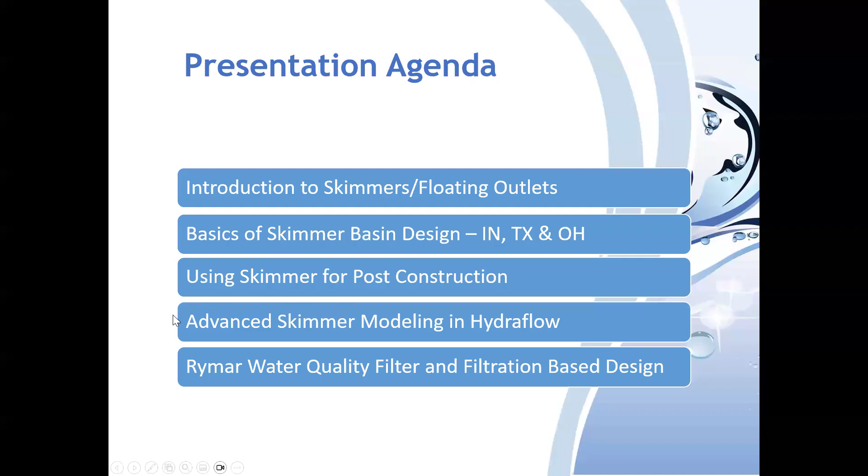So today's agenda: we're going to do an introduction to skimmers, or floating outlets as they're called in some places. We're going to go over the basics of skimmer basin design. We have a focus today on Indiana, Texas, and Ohio. Each month we do these and try to change up the states we focus on, so this month we're focusing on those three. Then we're going to pivot and talk about using skimmers for post-construction, why you would want to do that. We'll get into how you would model a skimmer in Hydraflow. And then we're going to wrap up with our water quality filter and a filtration-based design, which is a pretty new concept we just want to introduce to you.

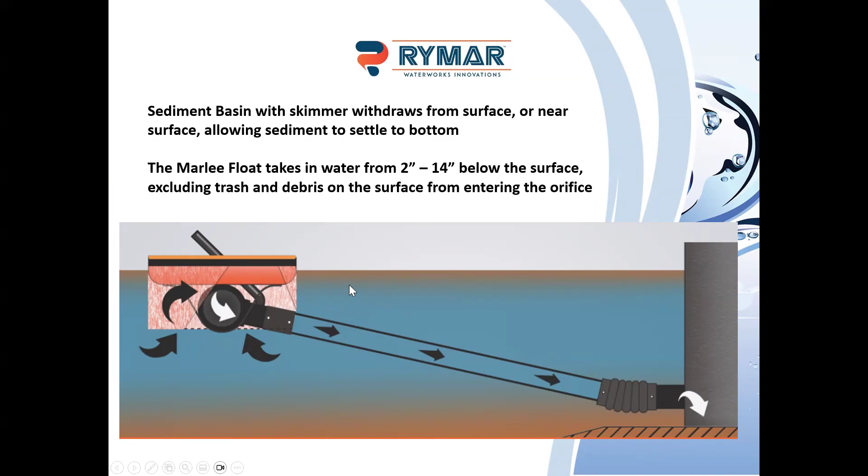Skimmers have been shown to be very effective. Typically it's fairly easy to achieve at least 80% trapping efficiency with a basin that's properly designed with a properly designed skimmer. So there are a number of skimmers on the market.

You've got the Faircloth skimmer - they were kind of the first to market about 25 years ago. The Erosion Supply Skimmer, or ESC, is kind of similar to the Faircloth. You have the IAS skimmer, which is kind of a T design, and then you have the Marlee float, which actually looks a little bit different than the others.

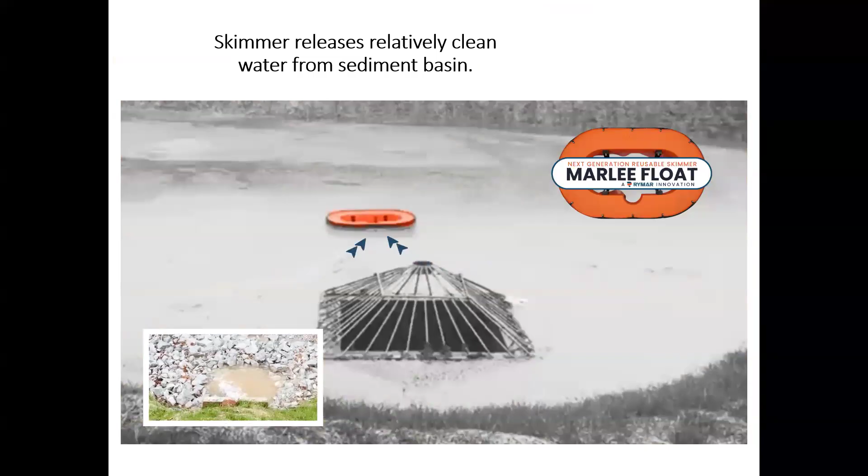So this is a little quick video. This is a sediment basin on a site that has about 8 acres disturbed draining to it. This is a major storm - it actually washed out part of the bank, but had really muddy water in the basin.

Here's the discharge. You can see there, it's really clear water, much clearer than you would probably think would be discharged from that basin. Really important here, this site was about 100 yards from a lake, and we really didn't want to get complaints from the neighbors about turning the lake brown. So anyway, the skimmer was working really well.

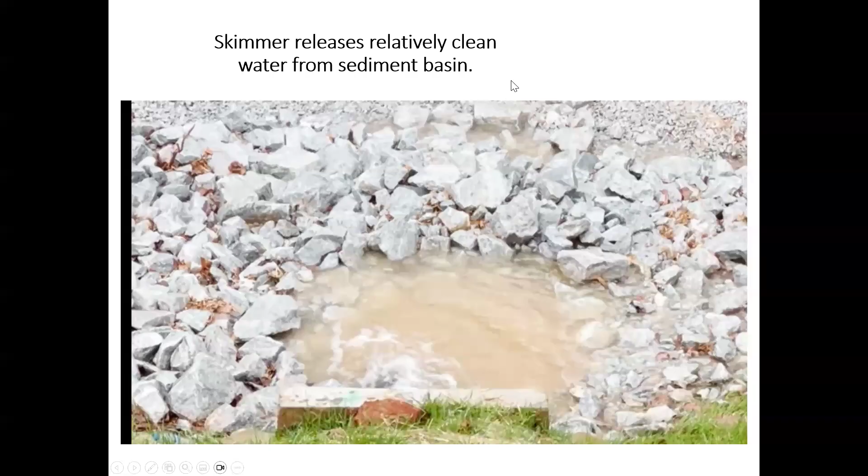Got to go really quickly here through the 3 fundamentals of sediment basin design. Number one is basin volume. The basin volume is based on the area flowing to the basin.

Regulations differ from state to state, whether that's total area or disturbed area used in your calculations. What we see in most cases is a range of 1,800 or 3,600 cubic feet per acre flowing into the basin. Some have other standards than that, Indiana being one at 5,600 cubic feet, but 1,800 and 3,600 are the most common. So for example, if you had 5 acres at 3,600 cubic feet required, you'd have an 18,000 cubic foot required volume.

Some areas, Ohio, Indiana, and Texas coincidentally, all require the basins to have a permanent pool volume or sediment storage volume that is not drained by the skimmer. You do not include that volume when sizing your skimmer. The most important thing is use the required volume, not your actual volume, to size the skimmer.

That's really important, especially if that basin is going to be a future detention pond, because that basin may have anywhere 3 times, 5 times, I've seen some even 10 times the volume required for sediment storage as the actual volume. If you size the skimmer based on actual volume, you're going to drain that required volume too fast and not meet your regs. So number two is dewatering time.

Sediment basins work on the principle of allowing time for sediment to settle to the bottom, releasing that cleaner water from the surface using the skimmer. That time is going to vary depending on your soil type. If you've got sandy soil, it's going to settle much quicker. Silts and clay take much longer. What we see is the most common standard is 2 to 5 days, and a lot of areas recommend trying to hit a 3-day target.

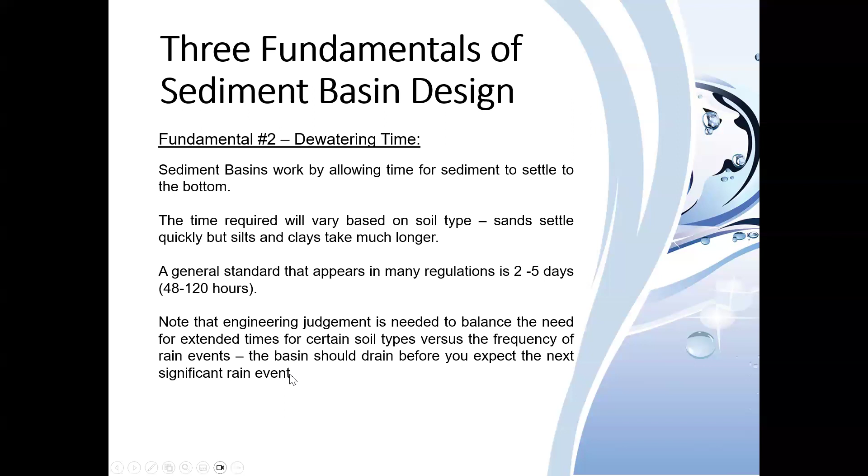The third one is simply the flow rate. Once you know your basin volume and your dewatering time, it's very simple to establish your flow rate: basin volume divided by dewatering time. You'll use the minimum dewatering time to determine your max flow rate, and maximum time to determine the minimum flow rate.

Once that range is determined, you can select the appropriate skimmer based on the manufacturer specification. In our example we had 18,000 cubic feet. If you drain it in 2 days, you'd pick a skimmer with a max flow rate of around 9,000 cubic feet per day. If you go out to 5 days, that'd be 3,600 cubic feet per day, so a pretty big range of flow. Note that a lower flow rate often results in a smaller and typically less expensive skimmer, but that's a secondary requirement.

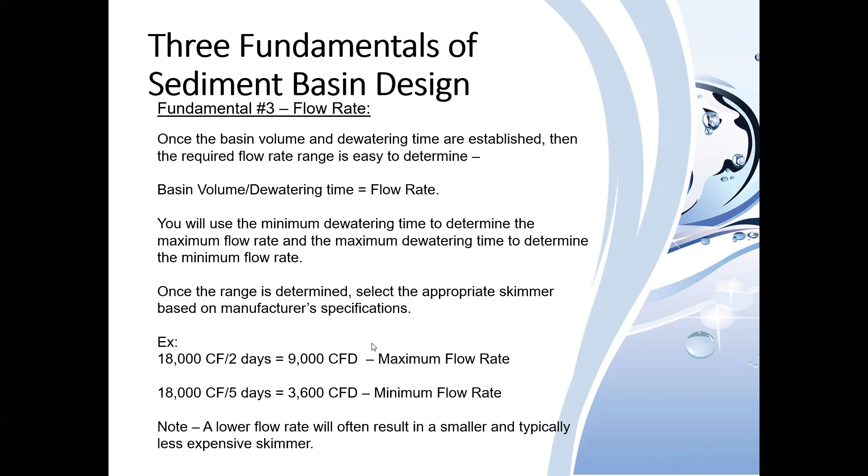So let's talk about Indiana standards. In Indiana, you're going to have a dewatering zone volume of 5,600 cubic feet per acre, or you can calculate it as your 1 year, 24-hour storm. Depending on your area in Indiana and rainfall, you're probably going to get a smaller volume by calculating that, so it's probably worth the time to go through and calculate your 24-hour, 1 year storm volume, or just use the 5,600 cubic feet per acre.

In addition to that, you're going to have 1,000 cubic feet per disturbed acre for sediment storage that is below the inlet of the skimmer. That's going to be like a permanent pool in your basin to allow for accumulation of sediment. Again, use the 5,600 cubic feet, or calculate it for the 1 year 24-hour storm.

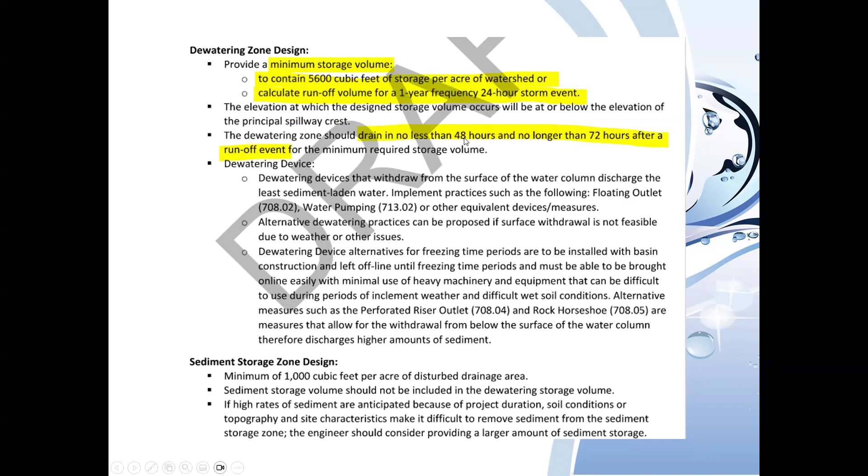The dewatering zone, they want drained in no less than 48 hours, or 2 days, and no longer than 72 hours after a runoff event. So a 2 to 3 day time frame. That's a tighter window than what we see in a lot of areas, but that's what Indiana has decided to use. They do say to withdraw from the surface of the water column, and they call it a floating outlet versus a skimmer.

If you're in Indiana or other areas that experience extended freezing time periods, we do recommend that you install a perforated riser with a valve, just a pipe out of your outlet structure with a riser on it, so that if you need to dewater and you've got a foot of ice or so at the top of the basin, that skimmer is obviously going to be frozen and not functioning well. So for folks in Ohio, Indiana, other places that get significant freezing, we recommend that.

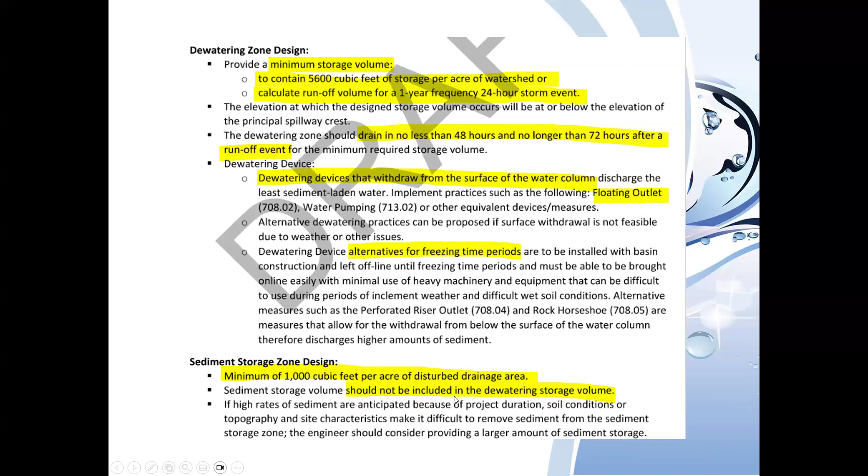And again, you've got 1,000 cubic feet per acre of disturbed area for your sediment zone. They say this should not be included in your dewatering storage volume when you're calculating the size of the skimmer.

So again, got the worksheet here, put that same information in there. They want to see the total watershed and disturbed area. The total goes with dewatering volume, disturbed goes with sediment storage. And then that dewatering time, 48 to 72 hours. We recommend that you put in that range of time when specifying the skimmer, so if a contractor wants to use a different skimmer, it's easier to hit a range of time than a very precise time, because all skimmers don't always flow the same.

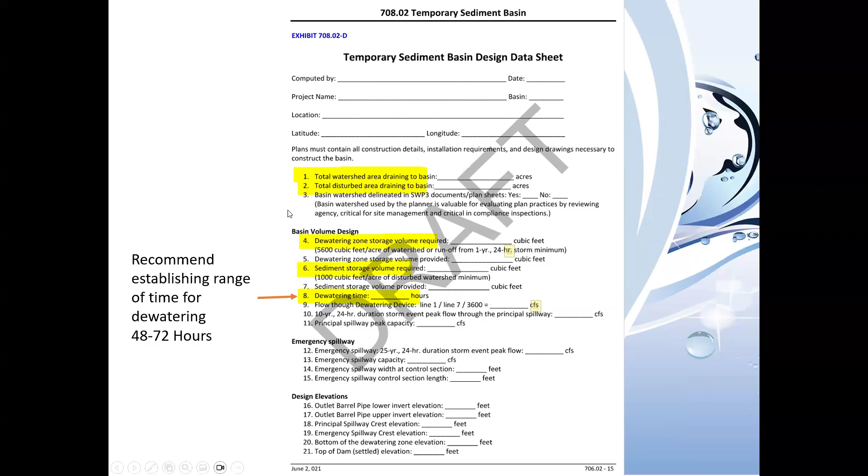So again, this is just the IDEM standards that are out there. Give me one second, too fast there, for sediment traps and basins. These have draft on them, I need to update that. They're not draft anymore, these are actually the current Indiana standards.

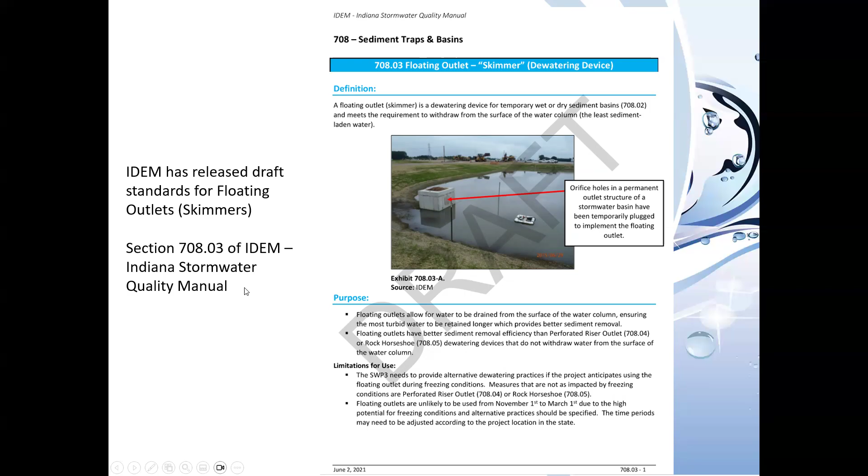All right, Texas sediment basin standards. In Texas, TCEQ has put out that you must provide sufficient storage to contain a calculated volume of a 2-year 24-hour storm. Remember, Indiana was a 1-year 24-hour storm. So you can calculate the 2-year storm, or if you don't calculate it, use at least 3,600 cubic feet of storage per acre drained. That's total area, not disturbed area.

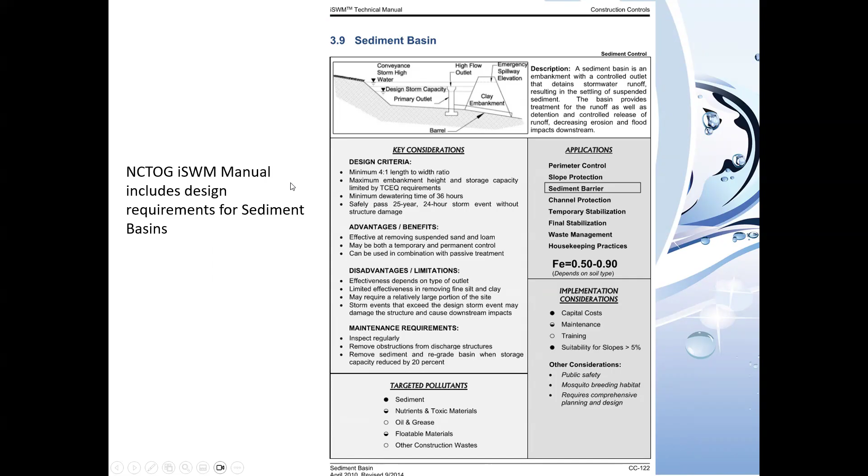They also say, unless infeasible, when discharging from sediment basins, use structures that withdraw from the surface, i.e. a skimmer. Again, the infeasible portion is pretty rare unless you're experiencing frozen conditions. Here's the North Central Texas manual, a different manual than TCEQ, and again they want you to use the manufacturer's flow rate when you select the discharge rate for the skimmer.

Again, minimum design dewatering time of 36 hours, and draining in less than 72 hours. So very similar to what Indiana has.

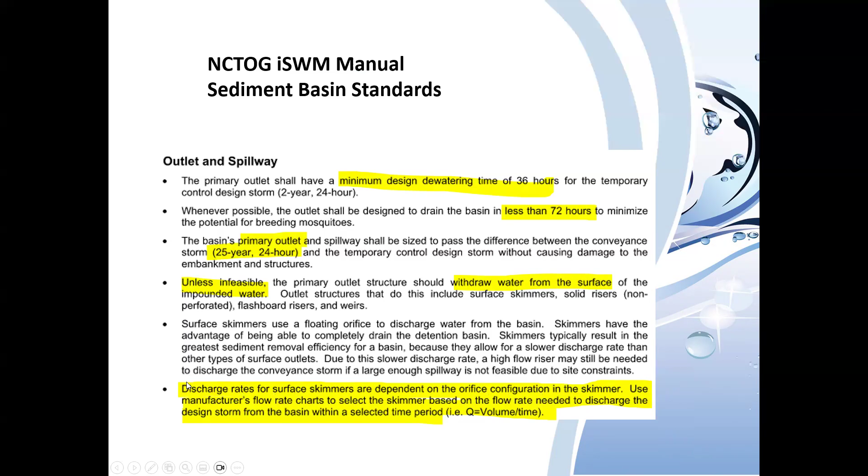The primary outlet needs to handle the 25-year, 24-hour storm. That primary outlet would be the skimmer plus the riser structure. Again, unless infeasible, you want to withdraw from the surface. Discharge rate for skimmers is dependent on the orifice configuration, and one important thing is skimmers don't all flow the same. We'll talk about that in a few minutes, so make sure you're using whatever the manufacturer recommends.

Same little worksheet here: you've got your total area, disturbed area, and minimum required volume on that.

Ohio EPA has some good information on their website, and they actually have a dewatering compliance tool you can use. They have a minimum sediment storage volume of 1,000 cubic feet per disturbed acre, very similar to the Indiana standard. Minimum dewatering volume is 1,800 cubic feet per drainage acre.

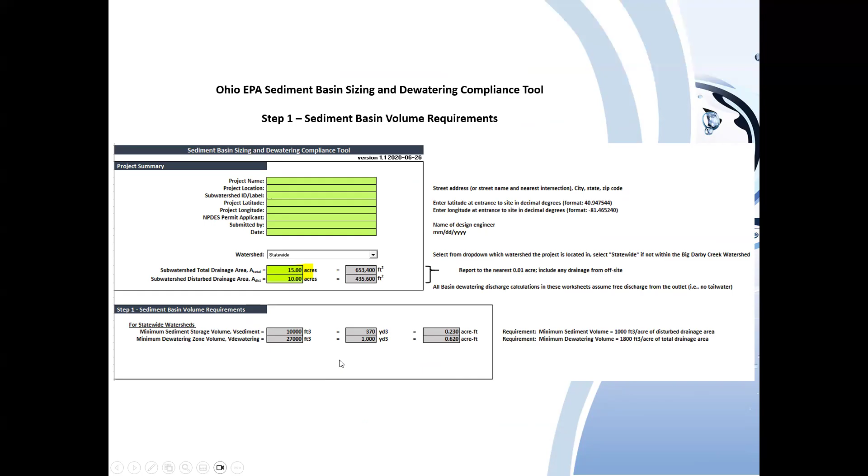If you're in certain watersheds, like the Big Darby Creek watershed, it goes up to 3,600 cubic feet. Detention time or dewatering time is 48 to 168 hours, so 2 to 7 days—a much bigger range of time than Indiana. They have this little tool you can use: you put in the total area and disturbed area, and it'll tell you the volume you need for both portions of your basin. When you build your basin, you build up that volume, and you've got your dewatering zone and your sediment storage zone.

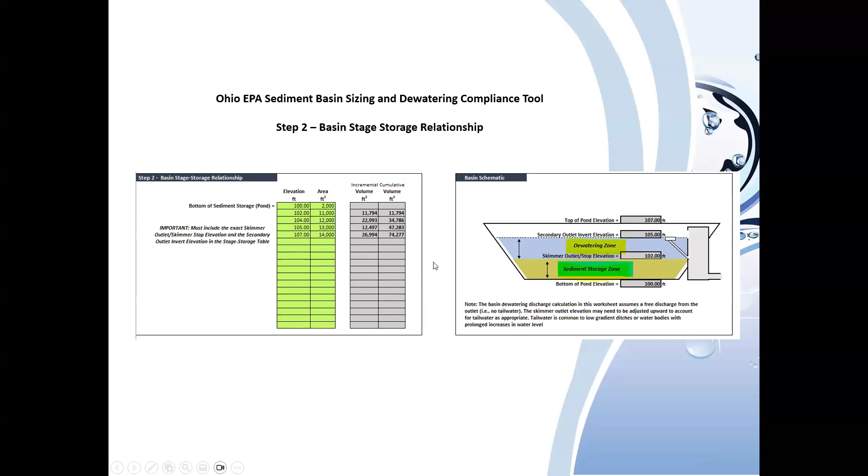I do want to point out that the Marley float is included in the Ohio EPA design tool. They have several different skimmers there, but since this is our webinar, we like to point out that the Marley is one of the selected standards there. We work very closely with Ohio EPA on developing our own design tool, which mimics the Ohio design tool very closely.

Just a quick summary, since we're talking about Indiana, Texas, and Ohio today—just to see how they vary. Basin volume anywhere from 5,600 cubic feet to 3,600 to 1,800, so a big difference in what your basin volume would be. Again, that's just what the states have decided. All three of these require 1,000 cubic foot sediment storage—I don't have that in Texas, but they require that.

Surface area—some states have a formula for this, these don't specify. Ohio has a max depth of 5 feet, Indiana says preferred depth of 3 feet, and Texas just has a length-to-width ratio to meet. The principal spillway design is anywhere from a 2 to 10-year storm. Emergency spillways are for a 25-year storm. Some places say any sediment basin has to have a skimmer; others say 10 acres or more has to have one. And then dewatering time again is 48 to 72, 36 to 72, and 2 to 7 days.

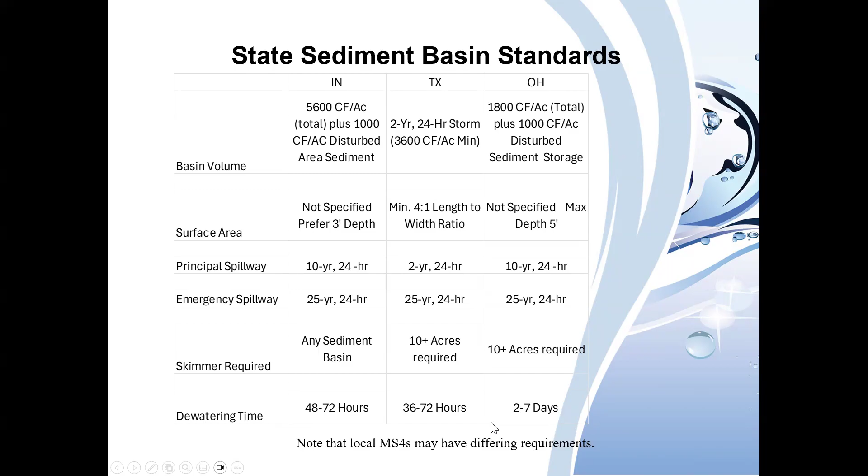So the point here is to pay attention to your state standards—they do vary quite widely from state to state.

We talked about skimmer flows. Skimmers are often thought of as constant head, constant flow devices, and that's not really true. This is a chart that TRI Environmental did when they did a study for Georgia.

For example, here they tested 3 different 3-inch skimmers: a type 2, a type 1, and a type 3. Their test tank is 4 feet deep, so they go from 1 foot to 4 feet depth. If you look at these at 1 foot of depth, 2 of the skimmers were very close, around 37 GPM, and one was nearly double at 70 GPM. All 3 skimmers had about a 25% increase in flow rate. At 4 foot depth, the 2 here were again pretty close, about 50 GPM, but the other one was again nearly double at 90 GPM.

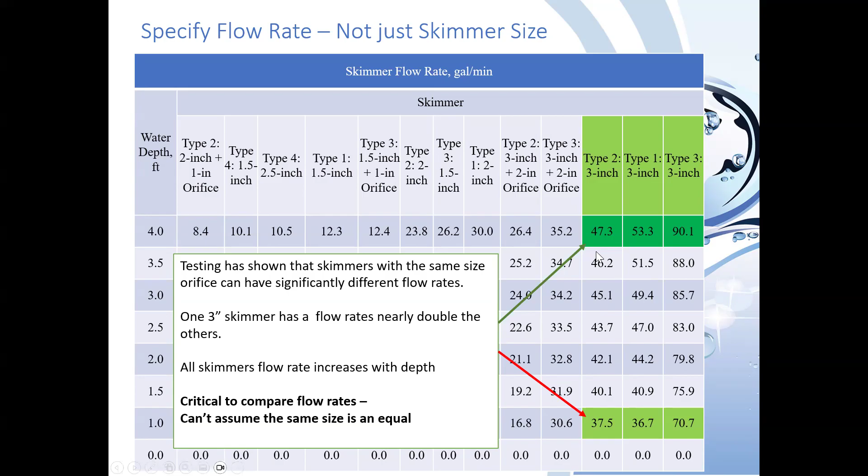The point is that if you simply specify a 3-inch skimmer without giving any more information on your plans, you may get one that flows at a rate different than you intended—maybe the higher flow rate drains the pond too fast, or vice versa, you intended the higher flow rate but get a skimmer that drains at half the time, taking too long. So it's important on your plans to identify the volume you're draining and the time frame and flow rate, so contractors can select a skimmer that meets those requirements.

Again, I mentioned we have a design tool—we have 2 different versions of this. This one is just for a dry pond. We have another one designed for a wet pond that includes the calculation for the sediment storage area, but they work very similarly.

You've got room here to put in your date, project name, location, company name, engineer, and your sediment basin description. We have 2 lines for other, since sometimes the sediment basin may change from phase 1 to phase 2, so you can put some notes in here.

One key thing here is this little box. We've created this check because reviewers have told us, and I know we have a few MS4 folks on today, that the biggest mistake they see from engineers designing a skimmer basin is using the provided volume, which is often much larger than required. So put in your area to the basin and whatever your required cubic foot is for your area, and that'll calculate that required volume for you.

Over here you've got a little input box for the tool. We've got our minimum and max time to drain, which is by default set to 2 to 5 days. But if you're in Texas or Indiana, you'll need to change that to 36 or 48 to 72 hours.

Pond depth is just the depth required to meet your required volume. If your sediment basin is 6 feet deep, don't put in 6 here. If you can meet your required volume at 3, you've got a top length and width and a bottom length and width. I've seen very few perfectly square or rectangular basins, so use your engineering judgment and manipulate these numbers so the calculated pond volume is close to your required volume.

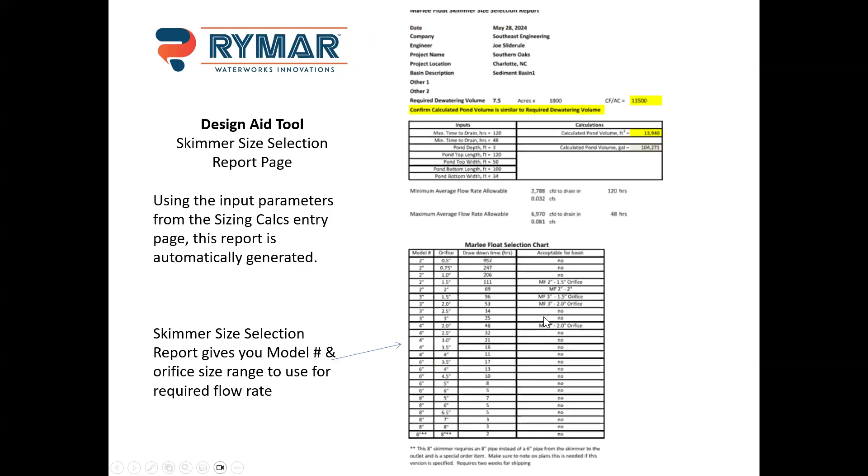So when you do that, our tool will calculate the flow rate for each one of our basins. And then each one of our skimmers, at the bottom there's a skimmer report page tab. When you click that, it takes you to the next sheet, a nice, neat 8.5 by 11. The top has all your information entered, your calculated volume, and it identifies the minimum flow rate for the maximum time and the maximum flow rate for the minimum time. In this case we've got a range of 0.032 CFS to 0.08, or basically just under 3,000 cubic feet to just under 7,000 cubic feet per day.

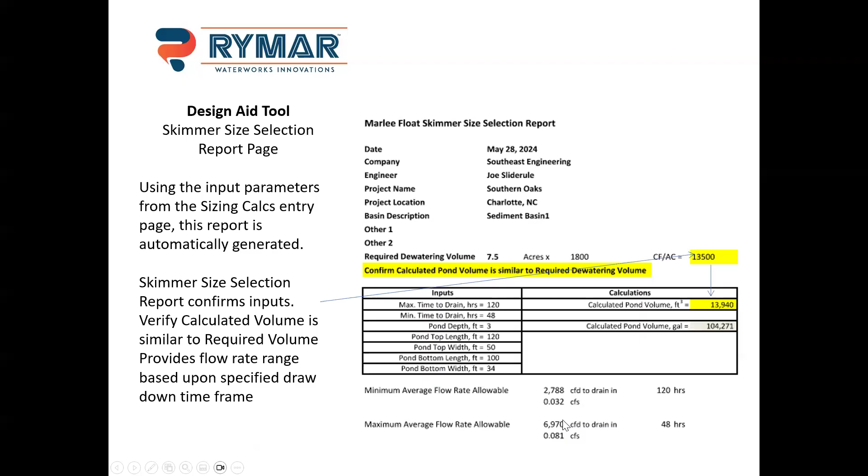And because it's our tool, we'll give you the drawdown time for every one of our skimmers with each orifice configuration, and whatever range of time you set will tell you which skimmers meet that range. In this case we typically try to shoot for that 3-day time frame, as a general rule.

So we would probably recommend going with a 2-inch skimmer with a 2-inch orifice to drain in 69 hours. If you want to drain it as fast as possible, you can go up to the 4-inch skimmer with a 2-inch orifice, draining it in 48 hours. So that'll calculate that for you.

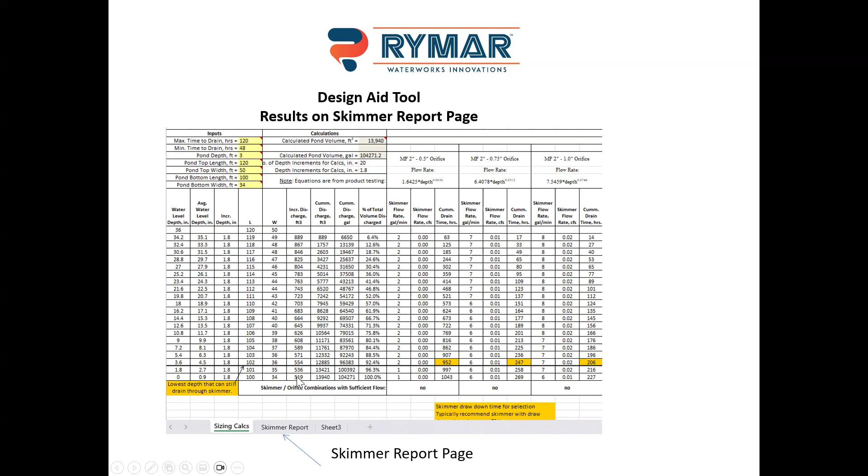One thing I didn't mention about our tool, let me back up. The tool takes this pond depth and breaks it down into increments, about 20 different increments. We calculate the flow rate through each increment to account for the flow rate curve on each skimmer. So this isn't just a standard orifice equation flow rate—it factors in that flow rate curve to more accurately give you the drain time for the basin.

We do have details available on our website. We call it our engineer's pack, a zip file that downloads our skimmer details and these basin details. There are 4 basin details included. This one would probably be for a temporary basin, so it doesn't have a riser structure, just a barrel going out.

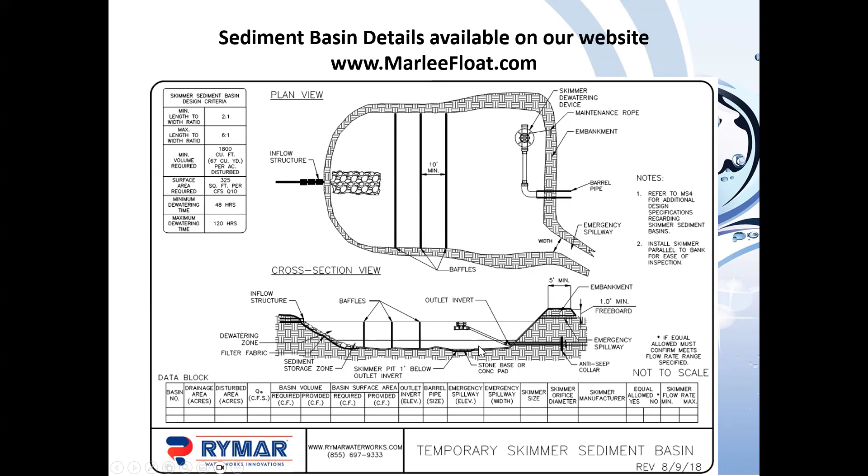So this one's going to apply to all the basins on site. You may have a minimum length to width ratio or maximum length to width ratio that may not apply in some areas. You're going to have sediment storage volume, typically 1,000 cubic feet per disturbed acre. Dewatering volume is 1,800 cubic feet per acre, but you can edit that, available in CAD to change it to 3,600 or 5,600. Surface area required may not be applicable.

Here's where you set your range of time. In this case, I've set it at 48 to 120 hours. Down here you've got your information, so you've got your sediment storage - you just want to make sure your provided meets your required. Your dewatering volume, again, if you've got a riser, this is going to be a permanent pond, so your provided is probably going to be much higher than required.

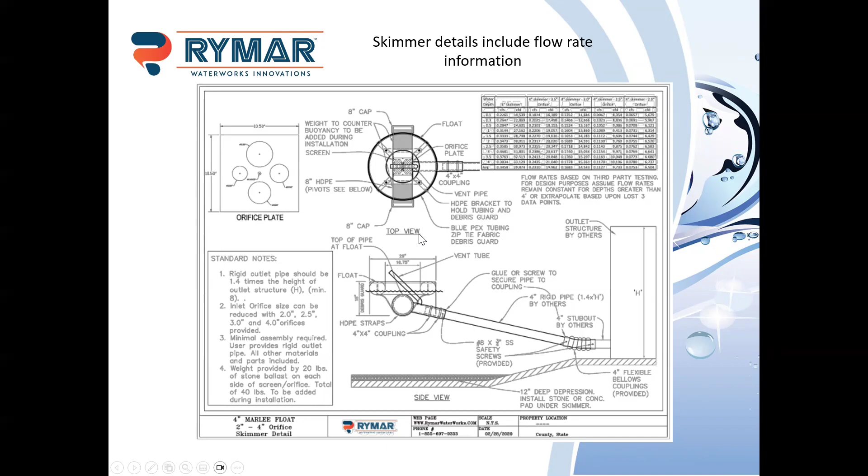The most common question we get is what length pipe do we need here? What we recommend is 1.4 times the height of your riser structure. What that does is allows this to get on like about a 45-degree angle, which is nice for the flow rate of the skimmer if it hits the max height. The only time we typically see clogging issues with the skimmer is if water comes over it. So if the pipe, say, was 3 feet and our riser's 6 feet, and water gets up, water's coming over the top of the skimmer because the skimmer can't rise that much.

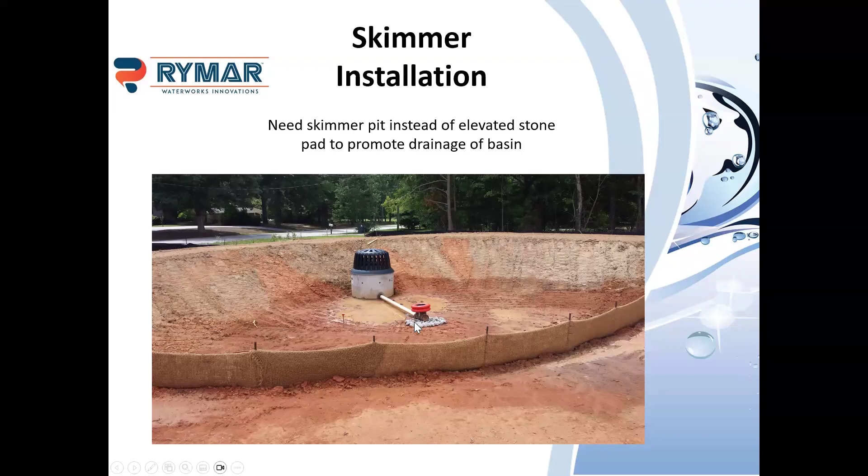Now, the states we talked about today have a permanent pool in here, so that really doesn't apply. So you're going to have an undercut here, and your skimmer's going to sit down. Skimmers are all gravity flow, so once they hit that invert elevation, they're going to stop flowing. And it'll take either evaporation or infiltration for the rest of the water to drain out.

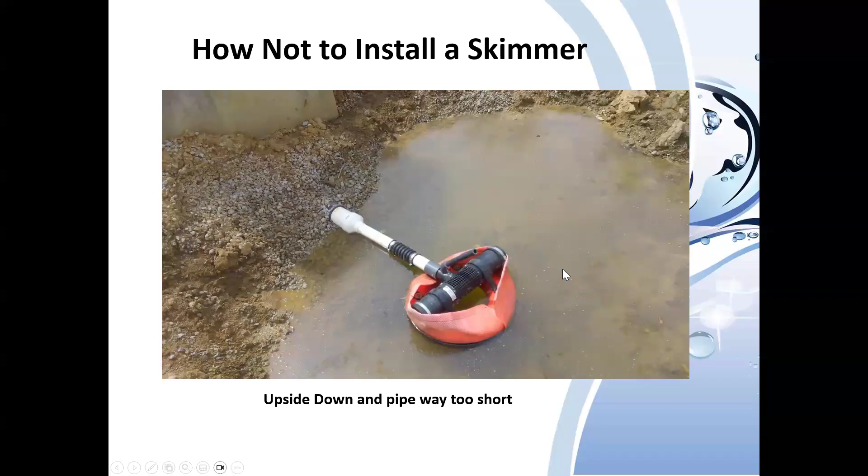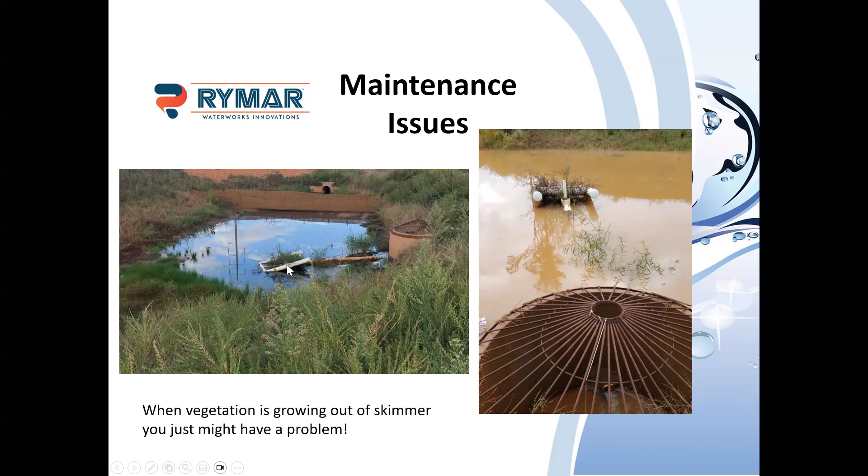So the pond's still going to drain down over time, but it's not functioning correctly, obviously. And skimmers are not maintenance free. This is another brand of skimmer that has a root ball in it. They had vegetation growing up out through the intake, and so this pond wouldn't ever drain because no water could get in the skimmer because it was clogged by the vegetation. You can see the mud here, it also needs to be cleaned out, but anyway, not a good job of maintenance in this case by the contractor.

All right, so that ends kind of the basic design information. Does anybody have any questions, or if they want to put anything in the chat, I'll be happy to answer.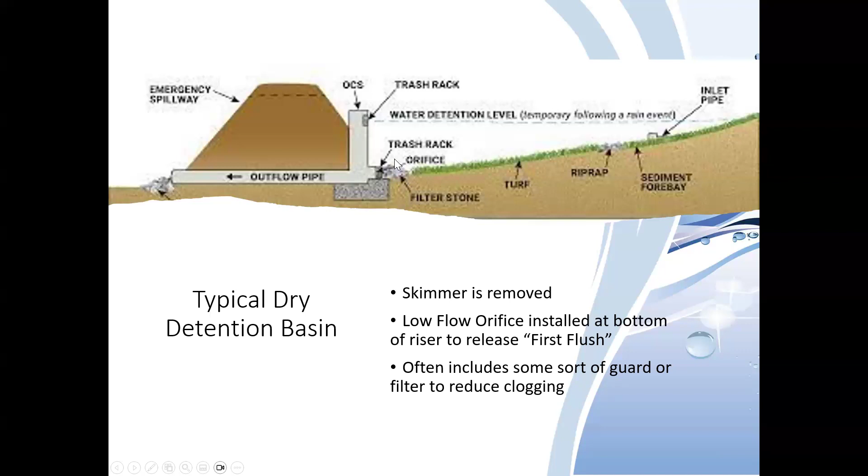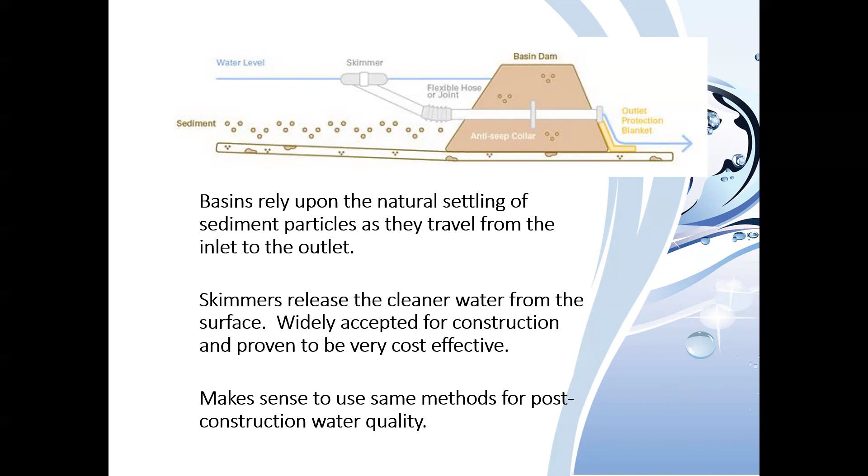Now, the other thing about this is the whole point of the pond and that first flush is to hold the water in the pond long enough for whatever sediment pollutants to settle out and come to the bottom of the pond. Well, now we're discharging from the bottom of the pond where that sediment pollutant load is the highest. So, just like during construction, we're using skimmers, it kind of makes sense to use skimmers for post-construction. Again, basins are relying on that natural settling of sediment particles as they travel from the inlet to the outlet. The skimmers release that cleaner water from the surface. Again, widely accepted for construction and proven to be very cost effective. So just kind of common sense says, hey, if it really works out great in construction, wouldn't it make sense to at least consider using it for post-construction to help us with water quality?

So a little case study on that. This is our site that we use kind of as our R&D facility unofficially, but this pond had been neglected for about 20 years. You see all this junk and debris in it. Well, it actually looks better now. We actually had to go in and cut timber out of this pond, 6 and 8 inch trees. But we got the county, once we got it all cut, we found out there's a 2 inch orifice 6 feet below what's now the bottom of the pond. So imagine you got all this muck and debris built up about 6 feet in this pond, and there's a 2 inch orifice down there.

That was the low flow orifice. So we redesigned the pond. We filled in the old orifices and put in new ones here. Instead of going back with a 2 inch orifice, we installed a skimmer with a 5 inch orifice. Our 5 inch orifice with very little head had a similar flow rate to that 2 inch orifice with say 3, 4, or 5 feet of head on it. So we were able to maintain the flow rate for our water quality volume using the skimmer, but do so in a way that's going to be much better for maintenance.

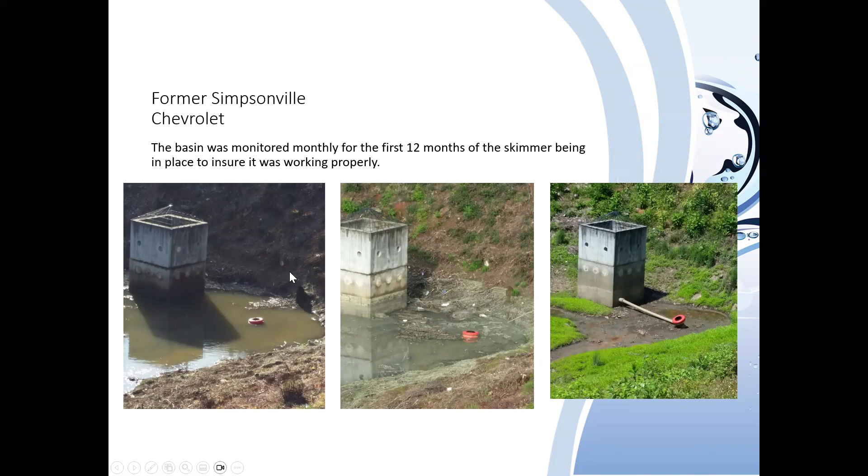This was actually the first skimmer approved in this county for permanent use, so they required us to monitor it monthly for the first 12 months to make sure it's working properly. And it was. These are pictures from those first 12 months showing it's really doing a good job.

About a year or so after it was installed, the owners of the pond decided to do some maintenance, cutting all the vegetation on the sides. The pond has really steep sides, about 1.5 to 1 slopes, about 3/4 of an acre big. The landscapers cut everything, let it fall to the bottom, and before they could rake it up and get it out, we had a 5 inch rain in just a few hours that washed all that debris down into the bottom. But you can see the skimmer sitting here amongst all that junk still drained the pond down, and even if it had clogged, it'd be much easier to get to.

If you can imagine, if this was a 2 inch orifice - it's hard to tell from this picture, but these are 6 foot riser sections, so these orifices up here are about 8 or 9 feet above the bottom of the pond. If you had to try to get to this with 9 feet of water in the pond, it would be extremely difficult and hazardous to do so. Having the skimmer there makes it much easier to get to.

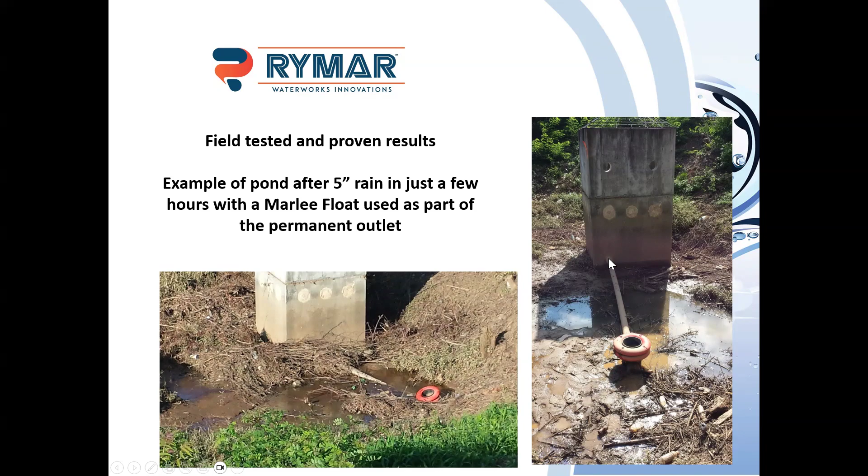We just cleaned this out, so I hadn't put the rope back, but typically you'd have a rope attached here so you can just pull the skimmer to the side, making it really easy to get unclogged if it does clog up. Much easier than getting down to a 2 inch orifice.

If you're going to consider skimmers for post-construction, you've got to be able to model them correctly in the hydrology software to get your pre and post calculations done and your water quality calculations done correctly. Hydraflow seems to be the most common software we use now. HydroCAD's out there, ICPR, XP-SWMM, there are a few others, but hopefully if you don't use Hydraflow, this example will give you the idea on how to apply it to other software as well.

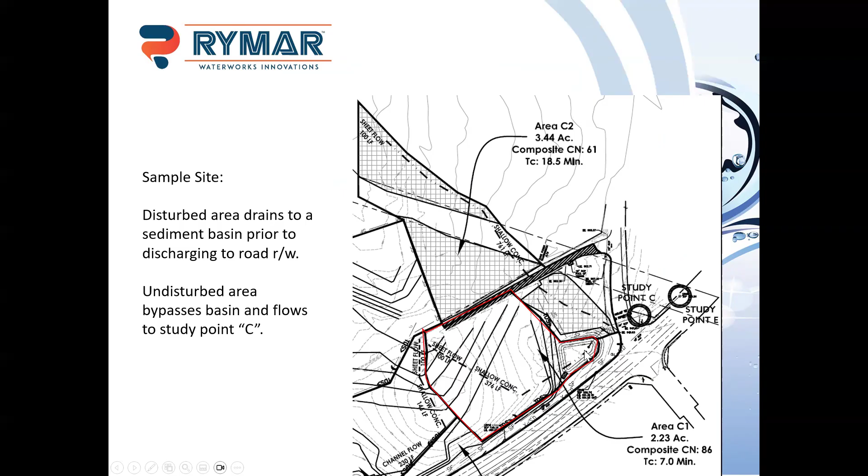This is a site I worked on many years ago in the city of Greenville. City of Greenville is a little unique, and they require quantity control during construction, so we had to run Hydraflow with our skimmer anyway to show we're meeting our quantity control. We had a site that's about 5.5 acres; this 3.4 up here was not being disturbed, and this 2.23 down here was disturbed, and it goes to this little sediment basin and then discharges down to a road.

For our pre-development condition, we had 5.5 acres, curve number 59, time of concentration was 18.5 minutes. Post-development, the portion disturbed, 2.23 acres, curve number 86, that's a bare earth disturbed condition, time of concentration down to 7 minutes.

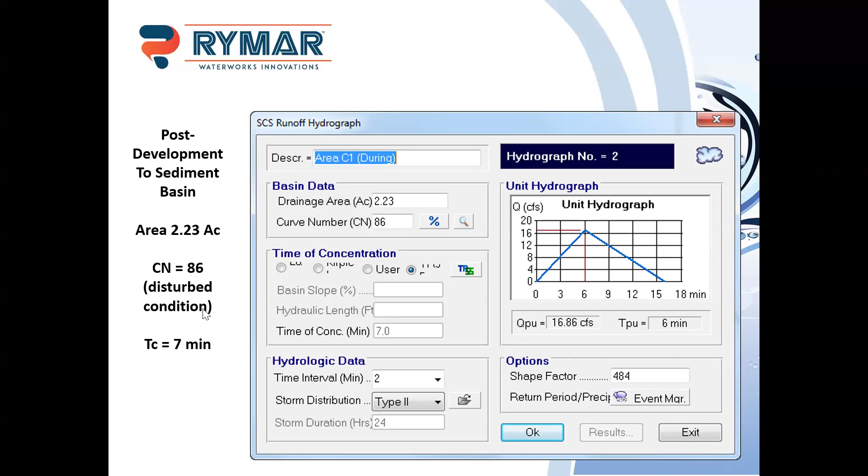A couple of things with Hydraflow: when you're building your basin, you want to put in your stage, elevation, and area. You want to put in stages so you can enter the data from the skimmer detail for the flow rate. In this case, we enter stages 0, 0.1, 0.3, 0.5, and every half a foot. Our detail gives you the flow rate for the skimmer at 0.1, 0.3, 0.5, and every half foot up to 4 feet. This basin happened to be 4 feet deep, so that worked out fine.

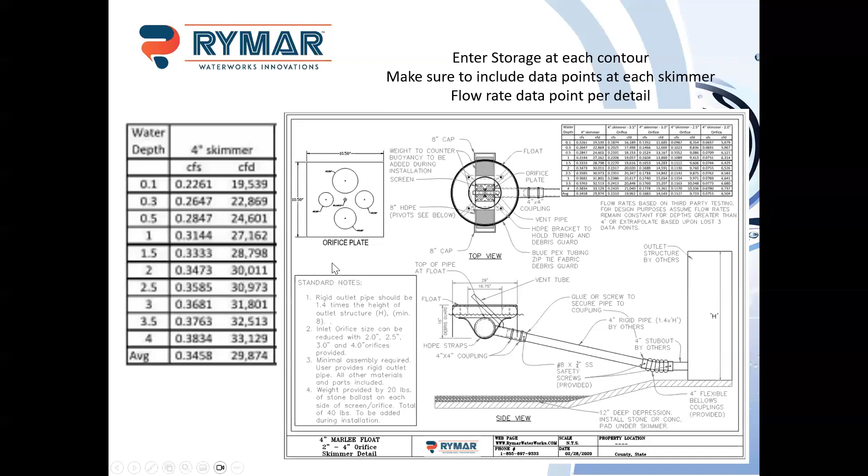Now, what happens if your pond's over 4 feet deep? You've got a couple of different options. If it's not much over 4 feet deep, you can just maintain that flow rate at 4 feet. Flow rates tend to flatten out around that, so they're not going up a lot. This is only going up a hundredth, so not a big increase in flow, not going to make a big change.

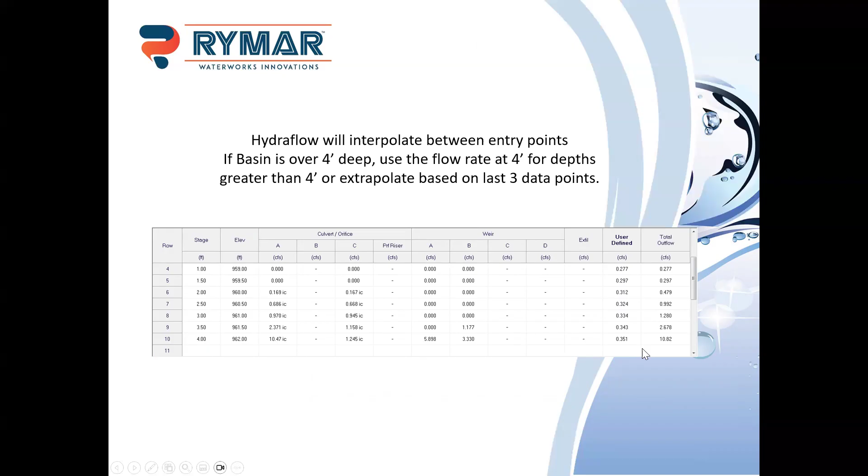Let's say it's 8 or 10 feet deep. In that case, what you'd want to do is go back and use our tool. You set your pond depth here at 8 feet, and again, it'll break that 8 feet up into 20 different flow rate increments, and it'll give you the flow rate at each increment.

Now, maybe I need to change this example up. This is our 2-inch with a 1/2 inch orifice, so this thing flows at a trickle. You only got 4/1000ths of a CFS coming out, so it's not seeing much change. But the bigger skimmers, you're going to see more of a flow rate change over that depth.

So you can use whatever depth of your pond, break that up, and use those increments to factor in the flow. Just get something close to the nearest foot or half a foot and plug it in. That'll help you build that flow rate curve. So if you put that here and there.

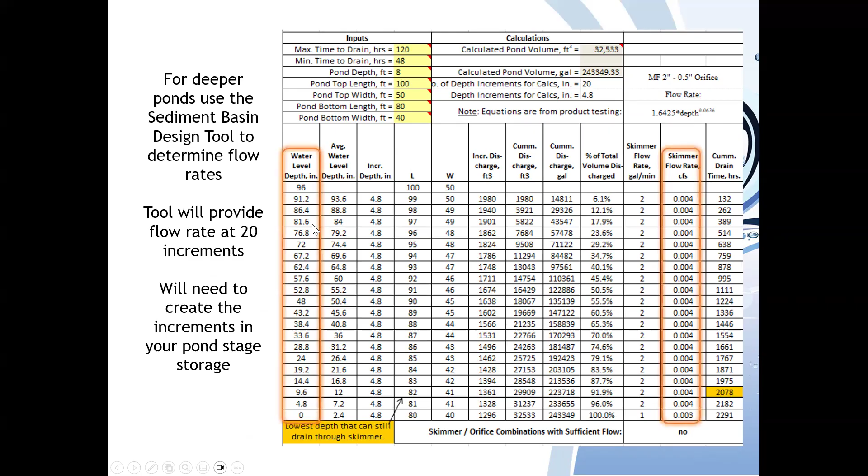Now, if you go back to Hydraflow and look at your outlet structure in a schematic, you got your riser structure, we got our 6-inch orifice, we got our rectangular weir. Normally you'd have a low flow orifice down here at the bottom, right? That would be your outlet. In this case, you don't have that because you've got your user defined, it doesn't show that in the schematic. But when you look at your stage discharge curve, this is your skimmer flow here till you hit that first orifice, then you hit the weir, then you hit the top of the riser, and it goes on out.

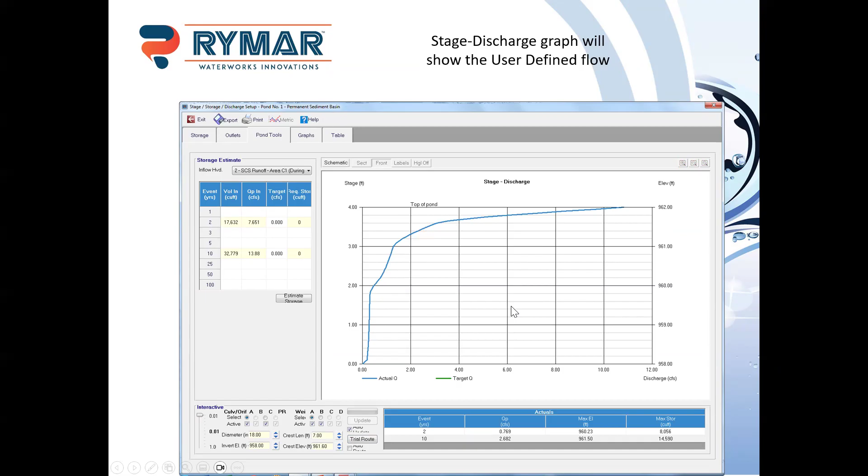So that's the quick version on Hydraflow. We'll talk about that a second. We have a little more advanced, more detailed study of that on our website.

So the last thing we'll get into here, actually next to last thing, I got one little add on at the end for you. This is advanced skimmer modeling for filtration-based water quality. Our newest product is a filter that goes around the skimmer, and it's intended to provide post-construction water quality. It's got an outer filter that's like a

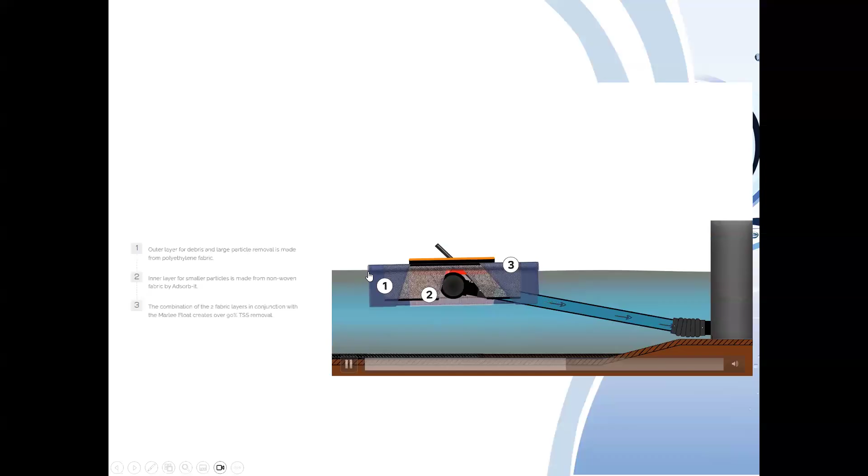polyethylene fabric, basically a Mirafi kind of fabric. It's basically just a screen, so we're screening out all the big stuff with that. The inner fabric here is a non-woven called Adsorb-it. It absorbs hydrocarbons, helps some with metals, and has some other benefits.

And the idea is that we're using our skimmer to pull the water in the top 3 feet, because all these filters hang down about 3 feet, pulling the water through the filters to clean them and go to the skimmer. Now, the filter is open at the bottom, so we're also using some gravity in this as well. Once the water gets below 3 feet below the skimmer, it can come up, but there's not enough force in that water flow to pull the sediment particle up with it. So we're just allowing gravity to do its job below 3 feet and letting the filter do the job in the top 3 feet.

So we also have some R&D underway. We're going to be looking at ways to do metals, hydrocarbons, and other pollutants.

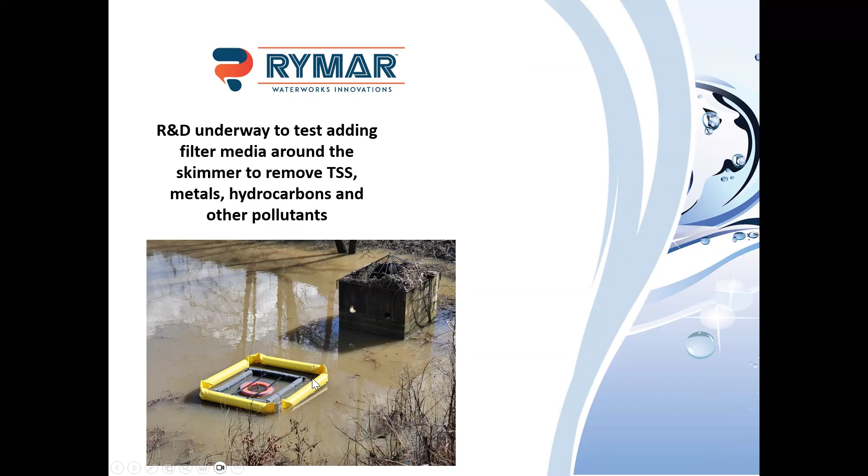This goes back to that same pond I mentioned earlier. That's kind of our R&D spot. This was our prototype, so we had our filter out there. What you can see is we had a screen - this is basically a turbidity curtain we used as a prototype with a screen in it, and that's our absorbent.

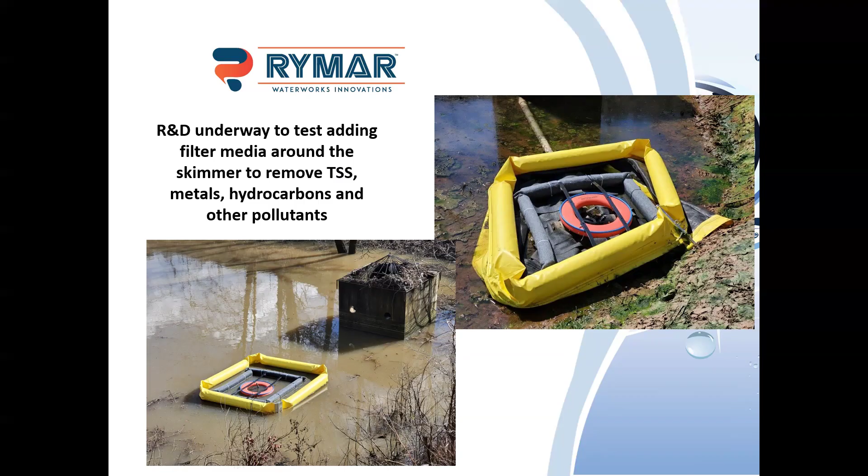You can see here, you can't see it well, but there's slits in this fabric. This is actually 2 layers of fabric, and they have slits in them, so they have 6-inch panels. The panels are all set 3 inches apart. The idea is to create water kind of weaving through that material, and it allows more contact time with the material to help grab those sediment particles, as well as some of the other pollutants in there.

This is a pretty good photo of the prototype. You can see the turbidity in the pond outside the filter is much higher than the turbidity as it gets close to the skimmer. This is actually the outlet of the pond. Pretty clean water - I definitely wouldn't drink it, but we can tell this system, filter and skimmer, is doing a really good job of releasing very clean water considering what's coming into the pond.

So once we prototyped this for about 2 years and felt like we had a good system, we had it third-party tested, and that testing confirmed over 90% TSS removal with this system. That testing was done by TRI Environmental. They tested 2 versions of the skimmer, and many of you may not be aware, but ASTM now has standards for sediment retention devices. So the standard we used was the C1746, which sets the protocol for doing all the testing.

One other thing we did during testing was figure out what the benefit of the filter and skimmer was, regardless of pond design. Most ponds are going to have a forebay, some may not. A lot of ponds have a significant travel distance from inlet to outlet, so you've got some settling that takes place. If we had set this up as a full pond model, it would be hard to know what percentage of the results came from other items in the pond versus our filter and skimmer. So we did a worst case scenario.

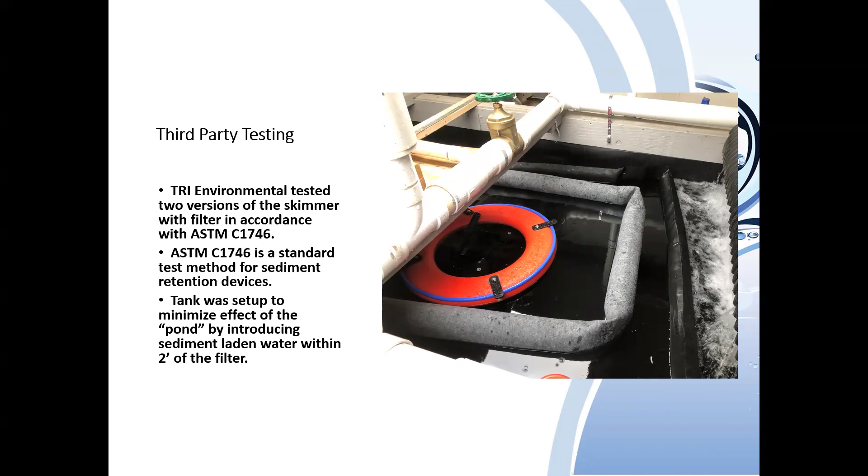The test tank was about 4 feet deep, with a maximum elevation during testing of about 3.5, maybe 3 foot 9 inches or so. So the filter was just getting off the bottom of the pond with water coming below there, which would be very similar to what you'd have in most cases for a first flush volume. You're typically only going to have 2 or 3 feet of depth in most ponds when doing that first flush water quality testing. We did all that and got that 90% result.

We've now developed a commercial version of this, ready to go to market, and put it back in that same pond. So we're testing this again. We've got a time-lapse camera set up on this pond to monitor it. We had some really interesting pictures when Hurricane Helene came through.

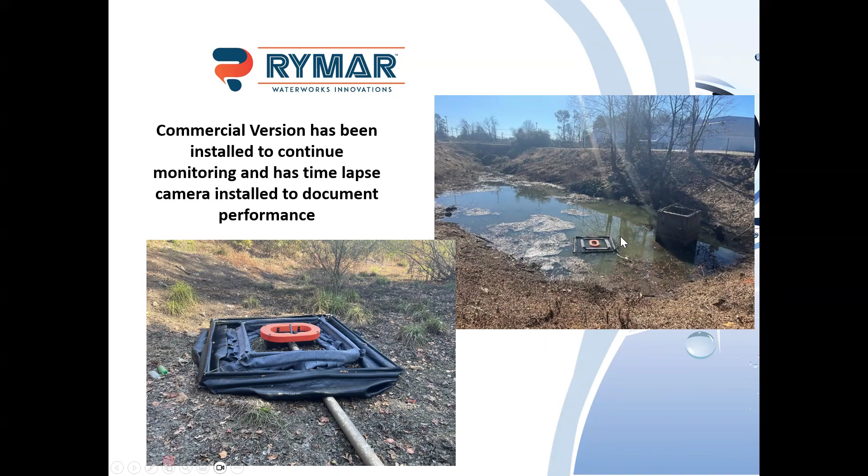This area is about a 40-acre watershed, really old commercial development, with very little stormwater management on the other parts of the watershed. So this is really the only pond in the area, and it gets a lot of junk, debris and pollution off the shopping centers. There's a substation up front and a lot of commercial development, so it's a really good test site for us to use as a prototype. If it works here, we're pretty confident it's going to work in most places.

So let's talk about why you would want to consider this. First, let's just look at the benefit of using a filtration method versus a settlement method for your first flush or for water quality.

The peak rate of discharge can be based on the filter treatment flow rate up to whatever the first quantity storm event is, or whatever storm event is handled by the filter. With the first flush method, typically you're holding that 1 inch or 1.5 inch volume for 24 to 48 hours, and that inflates the volume of your pond. If you can let that water out faster, up to whatever that first quantity control event is, typically your 2-year storm, you reduce the size of your pond.

The other thing is the filter treats 100% of the runoff from storms up to the peak rate the filter is designed to handle. So if you design that filter to handle up to a 2-year storm event, what happens with a small storm? Our accepted methodology doesn't really account for that quarter inch of rain over 8 hours. You still get enough rain to wash off the parking lot and pollutants, but it's just trickling into the pond and trickling out. If all of our pond water quality is based on ponding to generate settlement, and there's no ponding, there's no settlement, so very little treatment. But if it's got to go through the filter, we're going to treat those small storm events too.

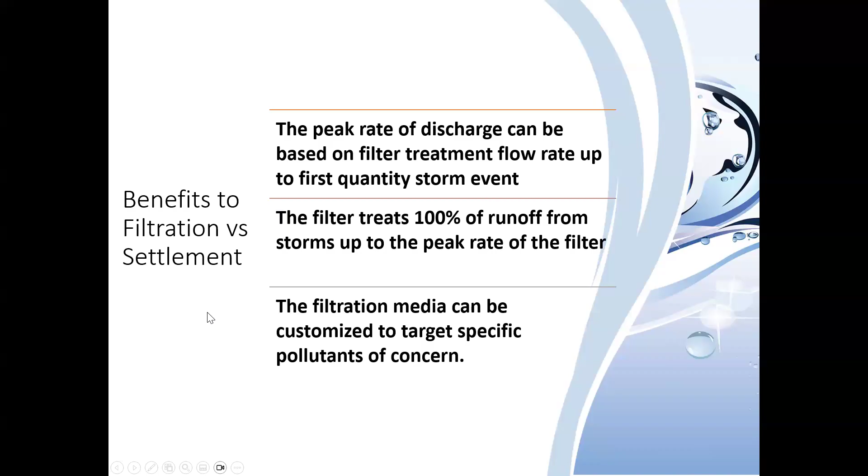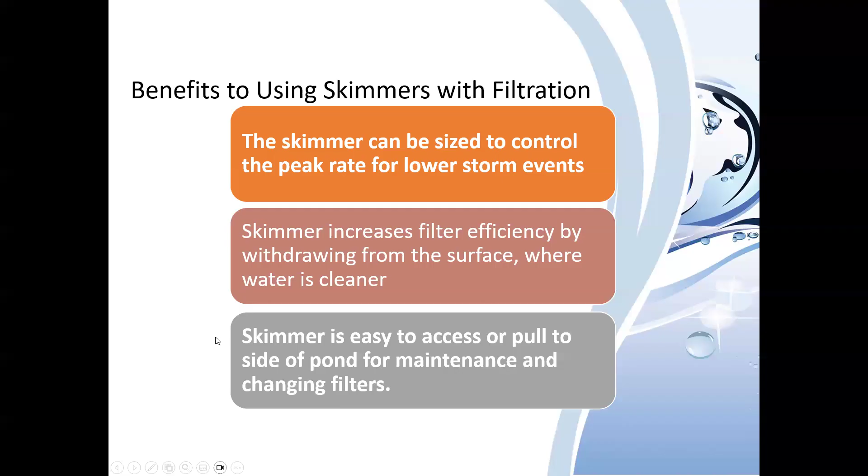Now if you combine a filter with a skimmer, you can use that skimmer to control the peak rate for your lower storm events. It's kind of hard to control flow rate through a filter, but the skimmer is going to control the flow rate. The skimmer also increases filter efficiency because it withdraws from near the surface where the water is cleaner, so your filter isn't having to clean the really dirty stuff at the bottom of the pond. It's able to filter the stuff higher in the pond, and it makes it easier to access or pull to the side of the pond for maintenance and changing.

That's not a perfect situation, there are going to be some challenges. Number one, your filters are prone to clog over time and will require maintenance and periodic cleaning or changing. We've prototyped both versions of ours. The original prototype was in there for 2 years, and the new prototype has been in there about 1 year and 3 months. We're going to keep it in there probably for 3 to 5 years to see how long it takes before it starts having issues. We haven't had to clean it yet, still working well. Number two, the skimmer's got to be durable and last more than a few years to be suitable for permanent use.

So you really don't want to use standard Schedule 40 PVC. PVC is not UV resistant, it's going to degrade pretty quickly in the sunlight and tend to crack or get brittle. Our product is an HDPE product, polyethylene, so much more UV resistant, much more durable, suitable for permanent use. You need something with at least a 20-year life for that.

And then the biggest one here, this really goes out to our MS4 attendees today: there are no established standards or basis of design and permitting when you combine a pond and filtration. Now there are some standards out there for MTDs, manufactured treatment devices, or proprietary devices, and you can sort of combine that with standards for a pond and put them together. In Georgia, a dry detention pond by itself does not meet water quality standards, you've got to do a pond plus something.

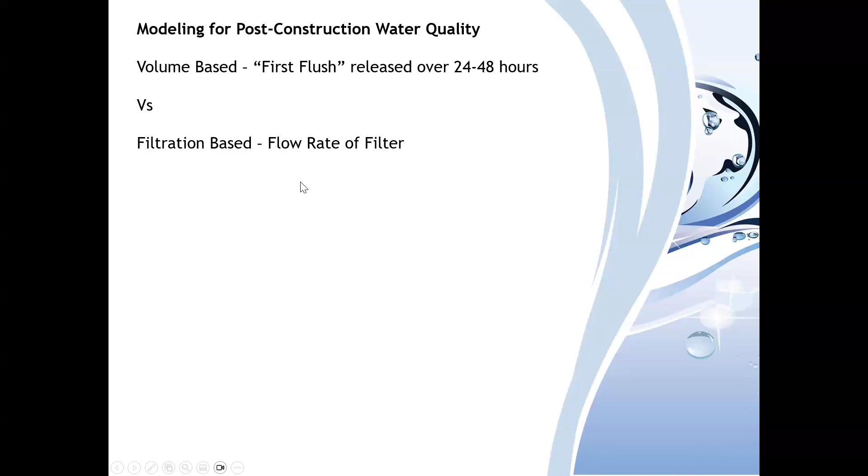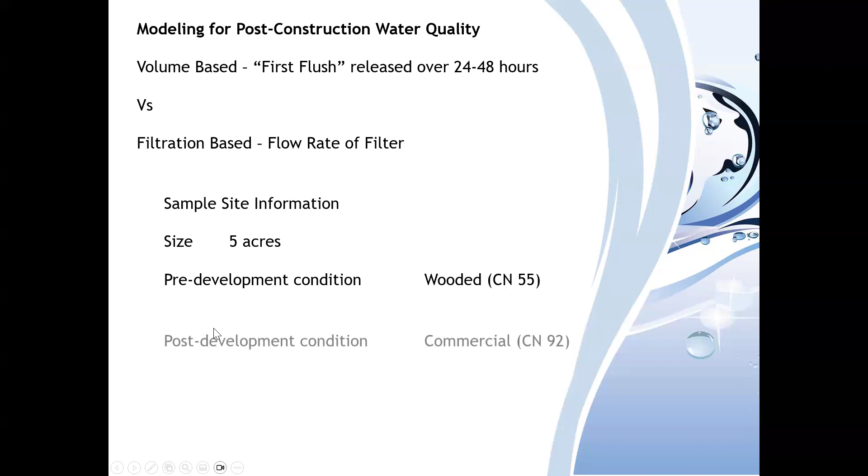Our sample site is 5 acres. We'll have a pre-development condition of 55 CN for a wooded site. Post-development, we're assuming commercial, little shopping centers, so we're going to 92. Our pre-development flow rates, based upon a 5 acre wooded site with a time of concentration of 48 minutes, would be 0.72 CFS for a 2-year storm, 3 for 10-year, 5.4, and 10.7. We're really just going to focus on the 2-year storm and below for this. The rest of these larger storms are going to be controlled by your typical outlet structure.

Next step is let's look at our water quality volume and our post-development flow rates. Based upon a 5 acre commercial site, we assumed a time of concentration of 10 minutes, and calculated the post-development flow rates. For a water quality storm, in this case for our sample, we did 1 inch of runoff.

It varies, I just happen to have it here. It's 1.2 inches in Georgia, 1 inch in Tennessee, and 1 or 1.5 in North Carolina. Indiana, I think, is 1.5. I'll have to look back and see what Texas and Ohio are. But let's just use, for this example, 1 inch of runoff, which is going to generate 18,150 cubic feet.

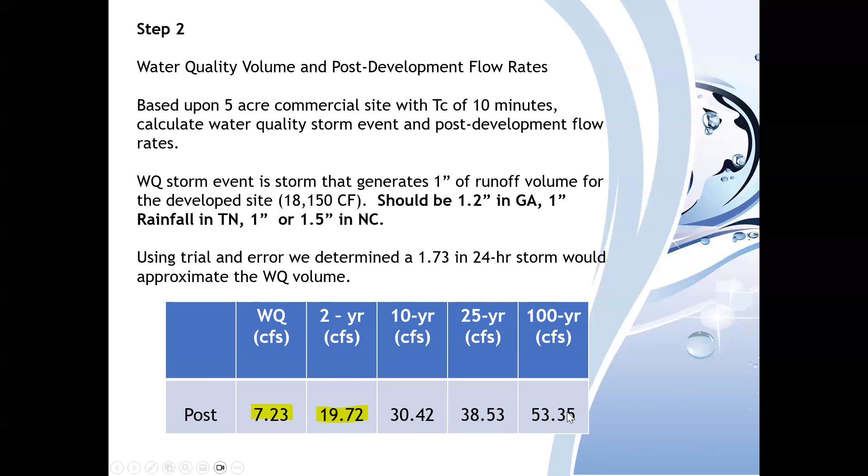We used trial and error, putting in a storm event, and came up with a 1.73 inch 24-hour storm that would generate the 18,150 cubic feet of runoff volume. So when we did that, our water quality flow rate post-development is 7.2 CFS, our 2-year is 19.72, and you can see our 10, 25, and 100 all jumped up a lot from pre-development.

Most engineers have a tool similar to this, a spreadsheet to help calculate that first flush orifice size. So first we're going to look at traditional design using a first flush method.

We've got a contributing area of 5 acres. Our water quality volume, again 1 inch over that total for a dry pond, is 18,150 cubic feet. We want to maintain the volume for 24 hours, so our average flow rate is 0.21 CFS. We do some calculations based on the orifice equation and average head, and voila, we come up with a 2.6 inch orifice that's going to release that volume over 24 hours.

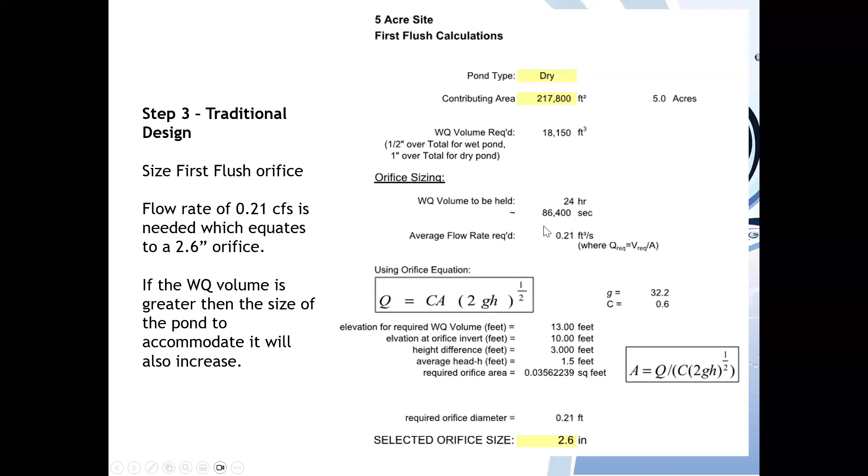Well, what are the faults for this? Number one, is this volume going to all enter the pond instantaneously? Obviously not. Even if you have the frog-strangling thunderstorm that downpours a couple of inches in 30 minutes, it's still going to come in over some period of time and go out over some period of time. So that's really not accurate to say this volume is going to get there and flow out. But that's what we use, and that's kind of the standard, so we'll go with that for now.

That's going to control our 2-year storm. We put in an 8 inch orifice 2 feet above that for the 10-year storm, and then the top of the riser controls from the 25, with emergency spillways for the 100.

So if we run that storm event, we're going to see that our water quality volume releases at 0.25. We were shooting for 0.21, so we're letting it out a little bit quicker than 24 hours. We have to tweak that.

Peak elevation is 12.5, so it's not getting all the way up to the 13. We've got a half a foot of volume we're not even using here, because the volume required in the pond is only 10,672 cubic feet, not 18,000 cubic feet. So we've got 7,500 cubic feet of volume in this pond that we're not utilizing for our detention, because it's built into this water quality volume, even though the water quality isn't using it.

2-year storm is going to release at 0.81. If you remember, our pre-development rate was 0.72, so we're a little bit above that, less than a tenth. Depending on the area and what you're doing, they may let you do that. Our 10-year and 25-year storms are being detained.

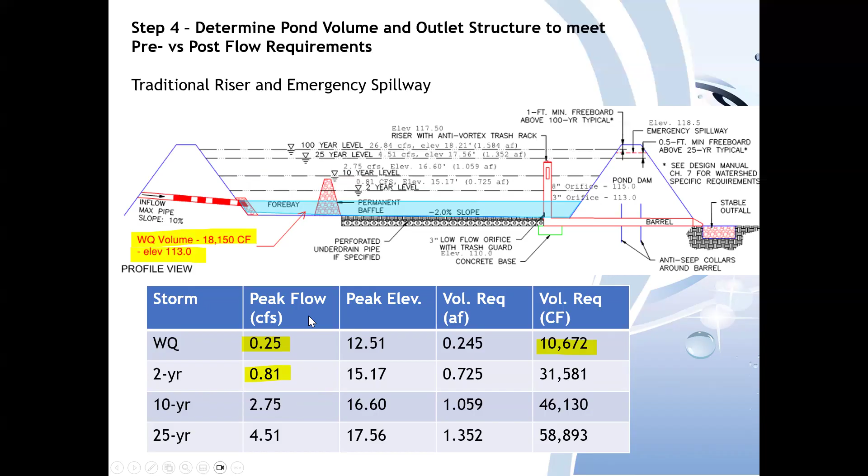So now if we said, hey, let's look at the option of doing it with a skimmer, what skimmer would we use? We're shooting for that 0.72. A 6 inch skimmer with a 6 inch orifice has a peak flow rate — this peak flow rate in this chart is based on a 4-foot depth, so it's going to be a little less than that at a 3-foot or 2.5-foot depth. So let's try the 0.78 CFS peak rate skimmer in here.

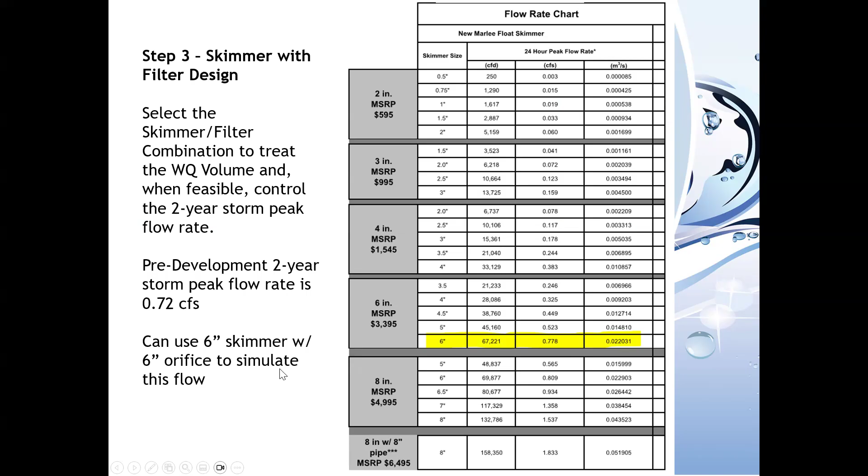So let's assume all the water goes through the filter — what's the max flow rate for that? Let's assume the filter is 100% clogged and all the water went under it — what's the max flow rate of that? So we kept those ratios based on the testing of our 4-inch skimmer, and applied that to our 6, our 8, and what we call our max 8, which has a flow rate of just under 2 CFS.

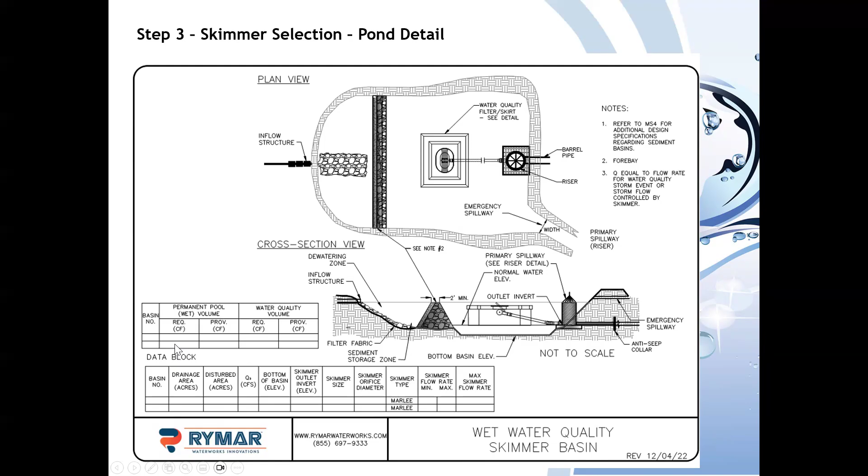In this case, because these filters can get pretty large, you need to pay attention to where they are in the pond and make sure they've got room and aren't getting stuck on a bank or side or something. So just something to be aware of. You may have a permanent volume in the pond, you may not — there may be a dry pond, maybe a permanent pool in here. But you've got all your standard information again, similar to our previous detail.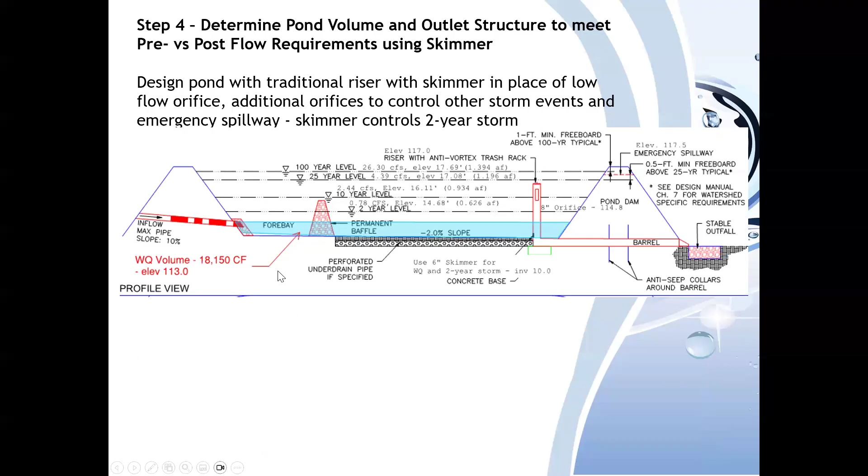So now let's look at the hydrology if you run it that way. We're going to model our 6-inch skimmer instead of a 3-inch orifice. What happens is your water quality volume is now getting released at 0.7 CFS. If you recall before, it was 0.25.

So we're letting the water out nearly 3 times as fast. Because of that, we're only using 7,600 cubic feet of volume in the pond, only getting up to an elevation of 112. So it's 2 feet deep here instead of the 2.5, or the 3 feet required by the volume. Our 2-year storm is letting out at 0.78 CFS, so we got it a little closer to that 0.72.

But the main thing here is the skimmer is handling the 2-year storm event. Because of that, since we've got the filter in here, every storm up to that 2-year storm is getting treated. 100% of the water has to go through the filter-skimmer combination. So you're now treating much more of the annual rainfall, not just that 1.73-inch storm for water quality. The 2-year storm I used was around 4 inches of rain, so a much larger rainfall is being handled now by the skimmer and filter.

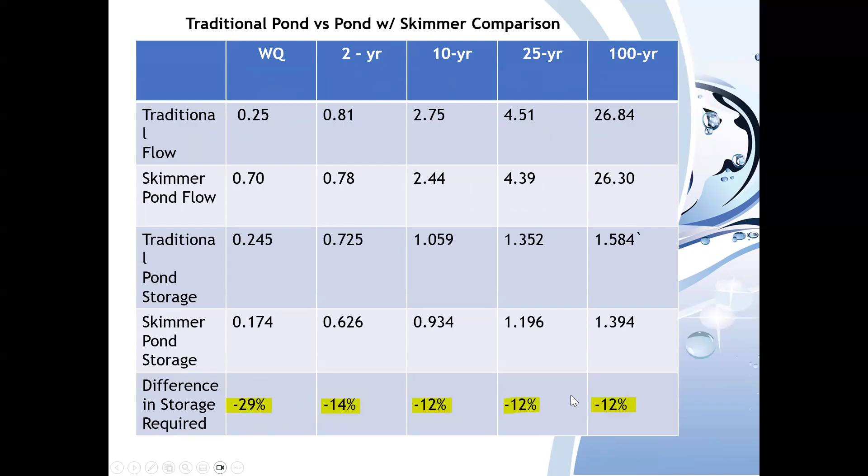So if we compare that—actually, I'm going to skip that slide, it's a little hard to read. This one's a little better. The difference in storage required for the traditional versus the skimmer is almost 30% for your water quality pond, and 14 and 12% for your other storms. So your pond got smaller.

Go to the summary here. Skimmers are less prone to clog, because you don't have the outlet at the bottom of the pond, and require less maintenance to keep the pond functioning properly. Again, ponds are designed to capture sediment and for the sediment to settle. It's settling to the bottom and it's going to cover whatever that low flow orifice is over time, so you're going to need more maintenance. If you use the skimmer, you're releasing from the surface, so it'll continue to function better.

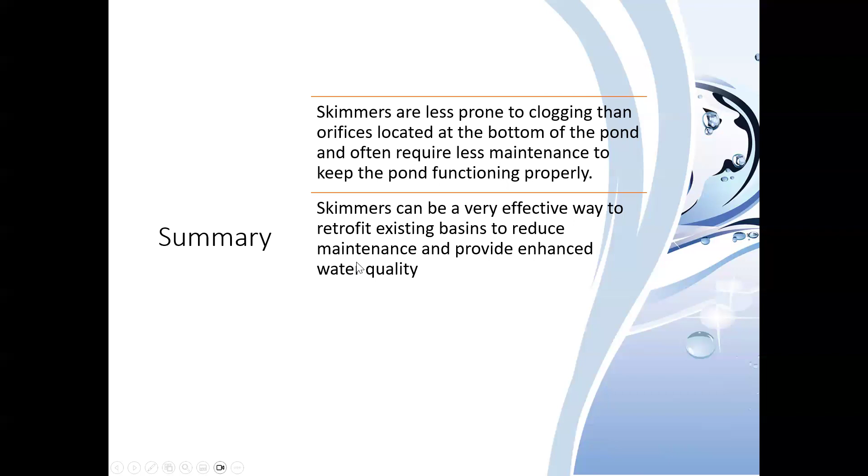Skimmers can be a very effective way to retrofit existing basins. I didn't mention that before, but I do want to mention it now. This is a great way if you're redeveloping a site and that site has a pond, but the pond was not designed for water quality. Let's say that pond's 30 years old—we didn't do water quality for the most part back then. Some areas didn't do water quality until the last few years, and it's just coming around.

So you've got a site with a pond in place, but you don't have room in the pond to hold that first flush volume because the pond would have to get bigger. If you can put the skimmer and filter in and maintain that 2-year flow rate, your pond size stays the same, and you've just provided treatment for the entire site to 90% TSS. So it's a great way for retrofit of basins, and again, the surface draw releases cleaner water for the basin.

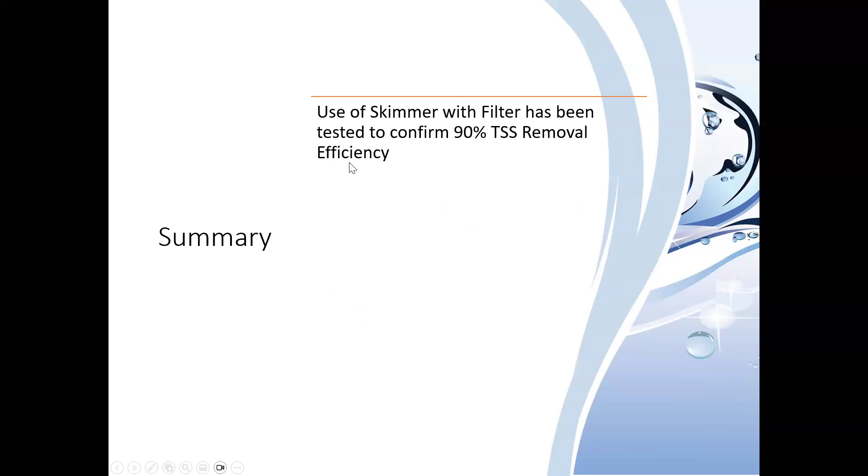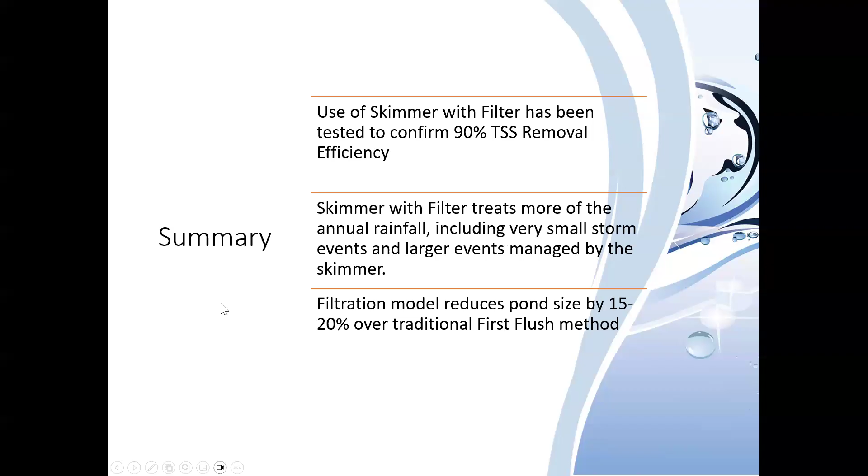Again, our skimmer has been third-party tested to confirm 90% TSS removal. It treats more of the annual rainfall—treats the very small storms up to the larger events, and it reduces your pond size. I've only had one engineer so far tell me that their client wanted a bigger pond, and that was in a coastal area where they needed the dirt, so they were digging the pond bigger and deeper. But pretty much everywhere else, they'd love to have smaller ponds on their sites.

So we'll wrap up here. Last poll question is for those of you that were maybe on the no or maybe—now that you're aware of the benefits, would you consider a skimmer for permanent use? I do want to qualify this: if you're in an area that has frozen conditions, you're going to need to have that alternate outlet in there, because you're going to have to account for that in some days.

We're about out of time, so I'm going to do a quick poll, but about half of you said yes, and others maybe had a couple of no's, and I understand that. Usually I get a couple of no's each time, which is fine. You're the engineer of record or the MS4, so you get to decide in your area.

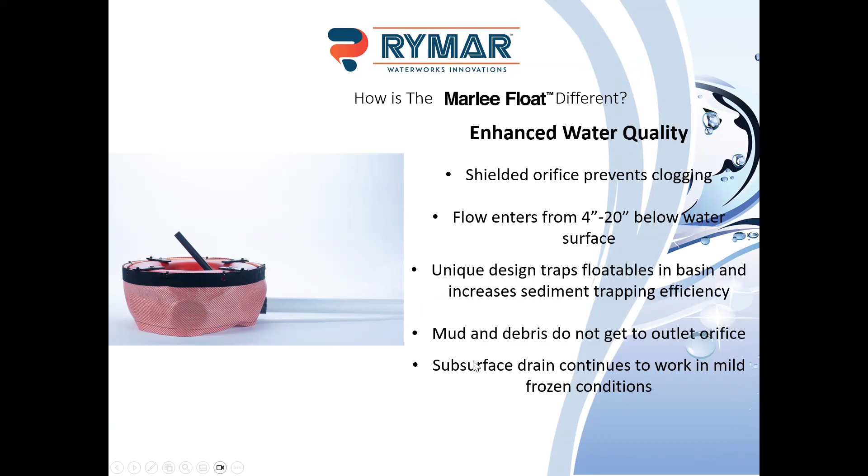This is about our skimmer. It is made of HDPE pipe, and it has this debris guard around it, so water has to come below that debris guard. We say it works in mild frozen conditions. So if you get a foot of ice, it's not going to continue to work, but if you get 2 or 3 inches of ice, it will still work.

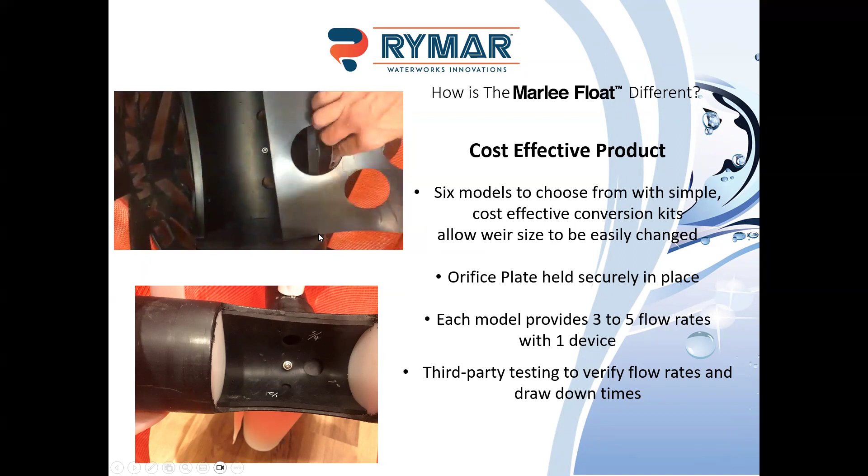This is our orifice plate. Talked about it earlier, so just wanted to show a quick video here how you take it out. It's got this little metal nub here. Make sure that the orifice is always centered on the outlet so it works well. Every model is going to have anywhere from 3 to 5 flow rates in each device, so it's going to have a wide range of flows, and they're all third-party tested to verify the flow rates.

We redesigned our skimmer about 5 or 6 years ago. The original version had some weight on the top, and it would kind of lean. This version always stays level. Hopefully nobody's ever out in the pond moving it around like that, but if they do, it comes back to where it's supposed to be.

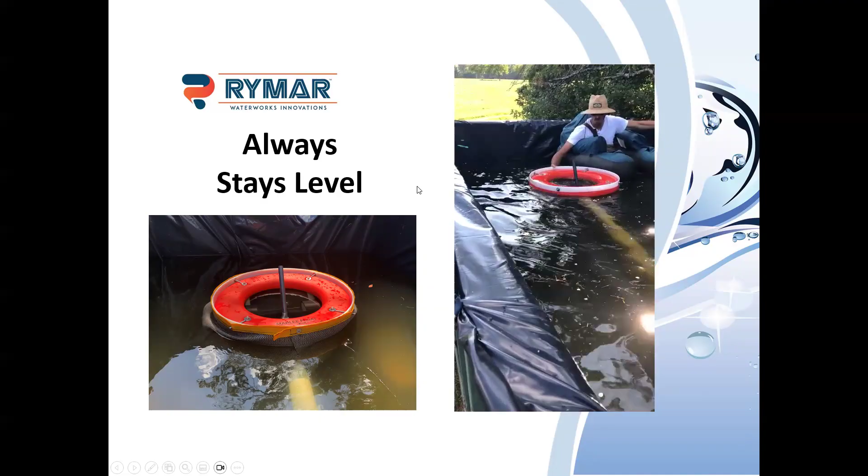Our 6 and 8-inch models are pretty heavy. They weigh about 200 pounds because they've got to counteract the buoyancy of the pipe, but they have handles on them to make it easier.

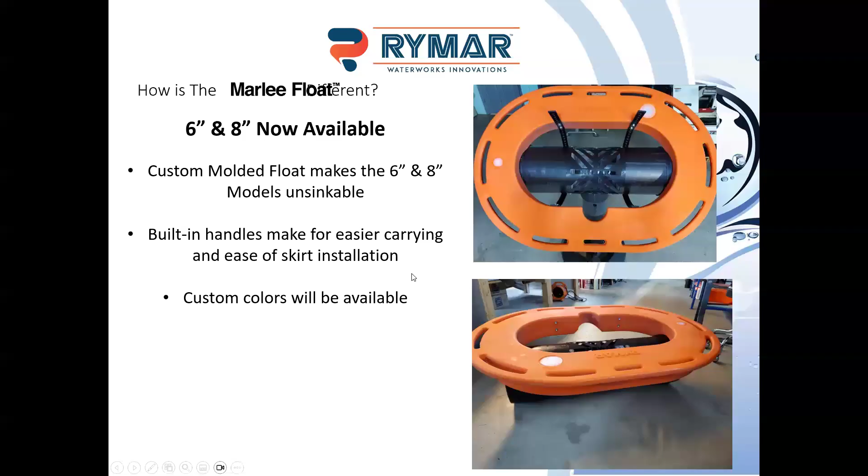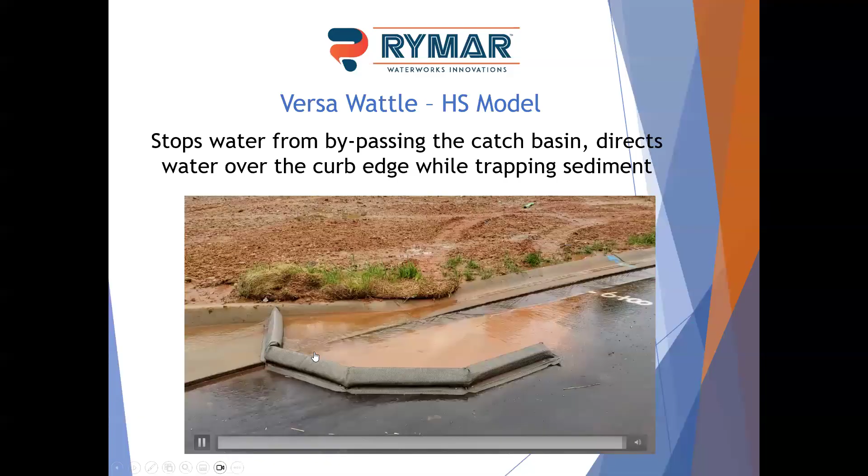Real quick, I'll show you our Versa Wattle. So this is designed to go in mainly places that have curb and asphalt, but not the final asphalt surface. So typically water is flowing down the road and not getting into the box. This goes down, traps some sediment, kicks the water over the curb into the box.

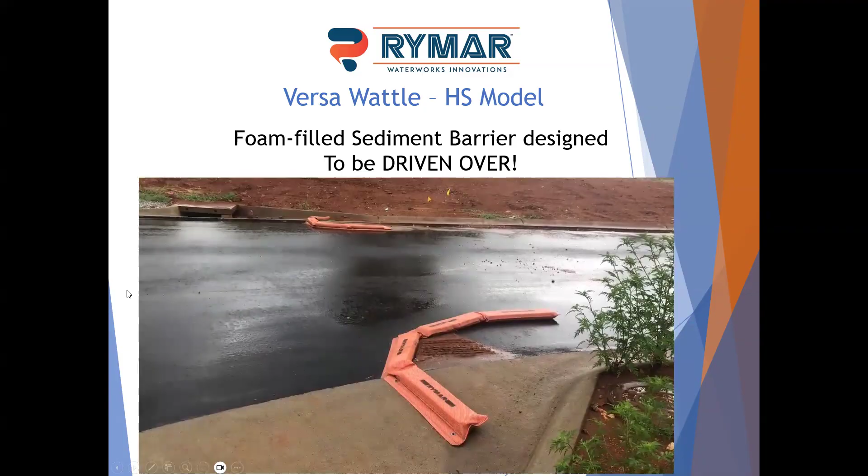And the big thing about them is they're designed to be driven over. So they can handle vehicle traffic or even have a dump truck drive over them, and there's not many other products out there that can handle that. So if you need inlet protection, especially on subdivisions that don't have final surface, it's a good product to have there.

Also, if you've got an inlet in a shopping center, like in the middle of a parking lot, it's hard to provide sediment protection there. You can either use some kind of bag underneath it. In this case, we're trying to keep the sediment up top to keep it clean, or in a sag here.